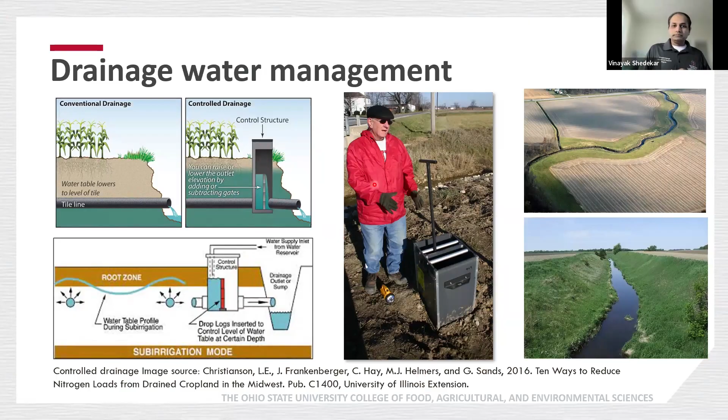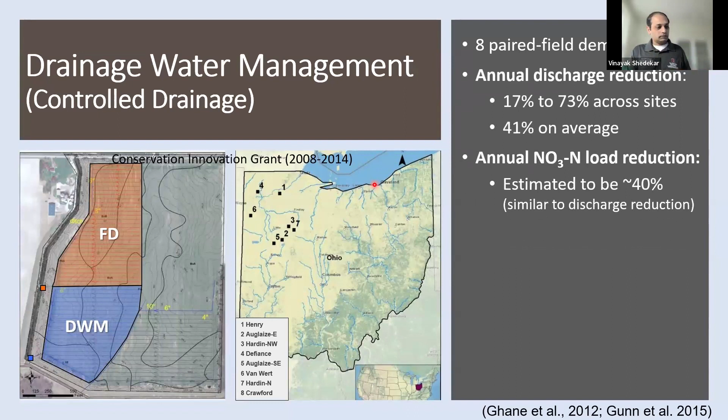Now, controlled drainage has been studied here in Ohio for the last 20 plus years. Dr. Norm Fausey, Larry Brown, and Dr. Barry Allred have done outstanding research on this practice. And we know that this practice works in flat landscapes for reducing discharge. It has really outstanding water quality benefits, up to 40% nitrate reduction.

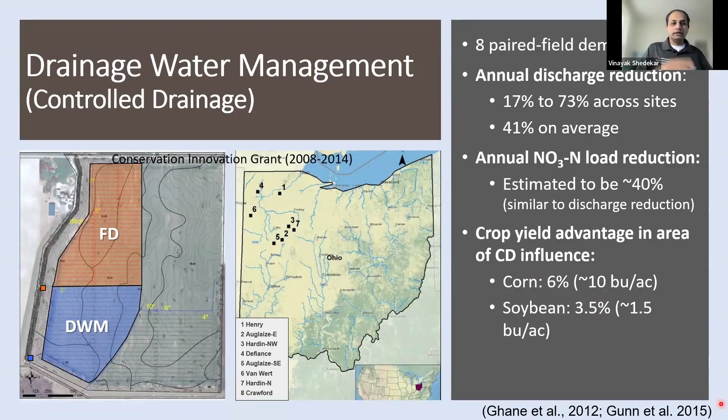And it does have some benefit to crop yield, especially in dry years. We have seen about 6% yield benefit to corn, about 3.5% to soybeans within that zone of influence. ODA has conducted similar surveys and found out that over 50% of the producers actually experience an increase in corn and soybean when they're using controlled drainage during the growing season.

Now, we know that controlled drainage is a win-win practice, mainly because it has the potential for crop yield increase as well as the benefit to water quality. However, it does not give you the surety that it will supplement all the water that is needed. My estimate tells me that there is about an inch of water that you can gain in a soil profile by practicing controlled drainage during the growing season.

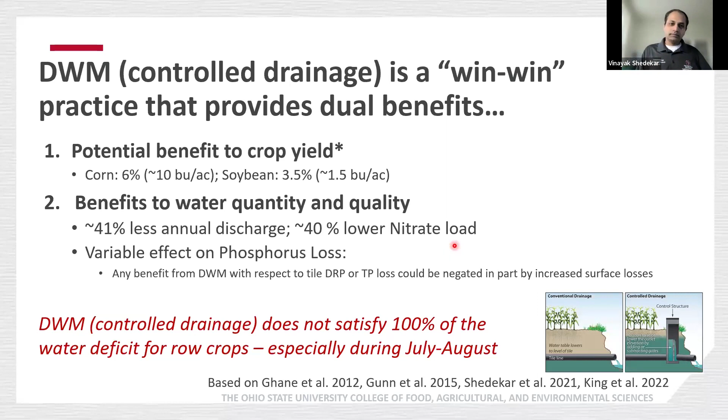It's a passive practice. You're going to retain more water in the field, but that doesn't mean you're going to retain water throughout the growing season. That water is probably going to get used by mid-July or end of July. And after that, you're still going to end up with a situation where the crops are suffering from a deficit. And that's where I think supplementing additional water through drainage water recycling comes in.

As the name itself describes, it's a simple practice where essentially instead of letting your drainage water discharge into a ditch, you're creating a storage structure of some kind, a reservoir, and using that water to then irrigate the cropland, whether it's that same field or some other field downstream. But essentially storing, capturing, and then using that water for irrigation is the concept.

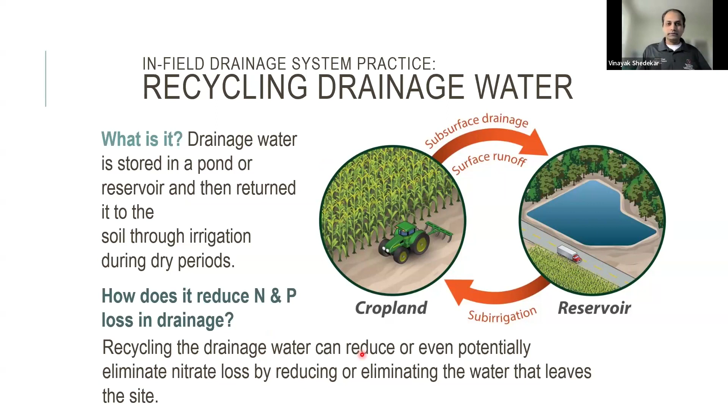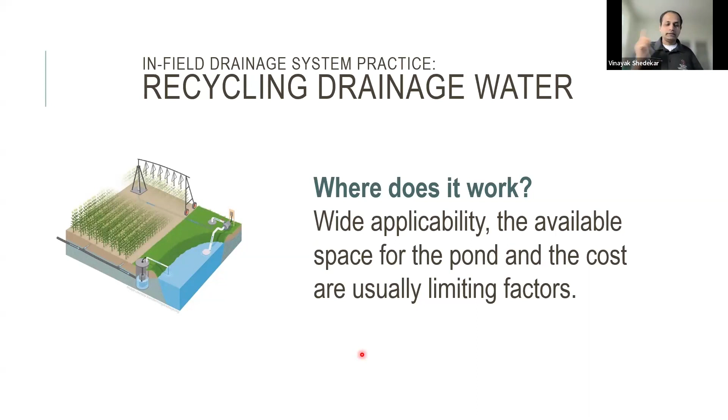And we have seen some really good benefits with respect to water quality, because you're essentially reducing the discharge from that field going into the downstream water bodies. And it also seems like we can apply it to landscapes that are not flat. With controlled drainage, as I said, the first criteria was it had to be a relatively flat field. You could potentially look at rolling topography where you could still be capturing the water and then pumping that back uphill for irrigation.

When it comes to capturing the water, I think I covered that with a reservoir. And then when you're irrigating, you have multiple options. It could be an overhead irrigation system, a subsurface irrigation system, or a sub-irrigation system. This also has recently been added to NRCS practice standard 447, which is now called irrigation and drainage tailwater recovery. It used to be irrigation tailwater recovery.

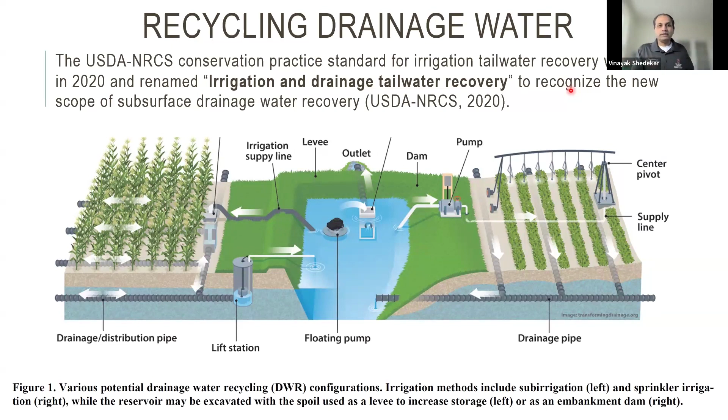So there is opportunity for some EQIP dollars to flow through for this practice. Unfortunately, right now here in Ohio, it's not on our EQIP list. So even if you wanted to, you won't be able to get NRCS funding for establishing a drainage water recycling system.

There's multiple benefits, as I mentioned. Irrigation is definitely going to help you increase the crop yields, water quality benefit. There is some potential to actually have an impact on downstream flooding, especially if you're putting a reservoir at a larger watershed scale. And then there is possible options where you could be integrating this with your manure application, using it for dilution and so on.

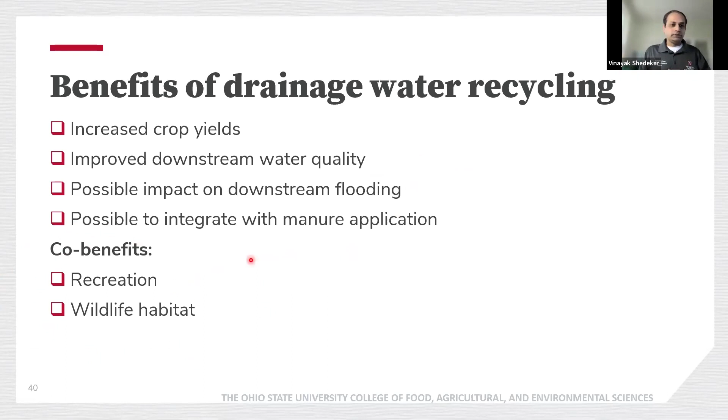There are co-benefits as well. There is co-benefits with respect to the wildlife habitat and recreation as well. Here is a regional synthesis that was done on drainage water recycling.

Drainage water recycling. We had an increase in, I apologize, I'm working from home and here's some background.

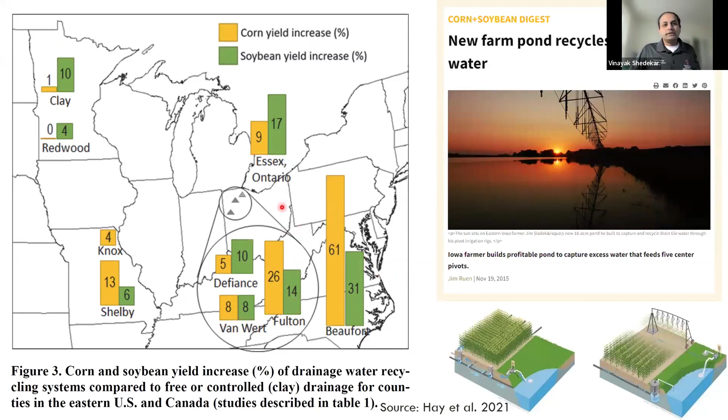So there is definitely some increase in crop yield response with drainage water recycling. One step further beyond that, we do have the option of pairing it up with more ecological practice like the wetlands. And interestingly, this research was done in the 1990s. So we have already proven here in Ohio how a drainage water recycling system can exist with.

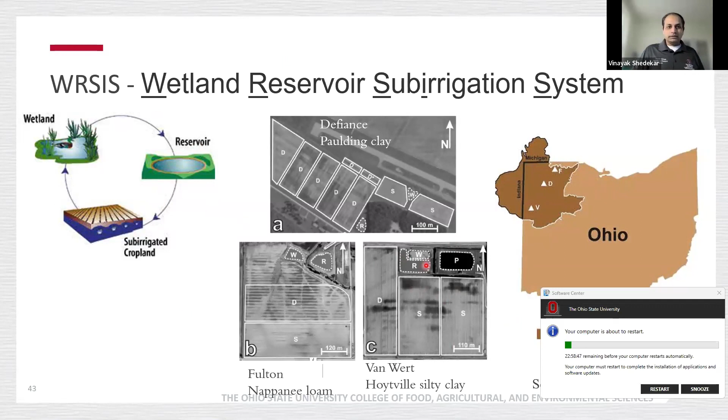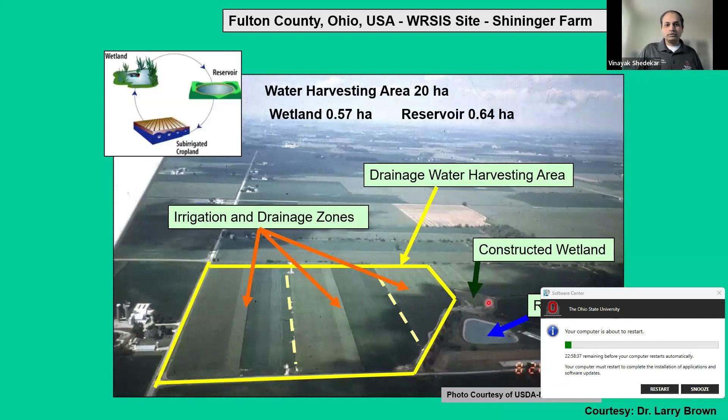And there was 10 or 15 years of research done. Here is an example from Fulton County, where they had a field that was sending water through a wetland into a reservoir, and that was being pumped back into those fields. There's a nice fact sheet on the Transforming Drainage website that shows you the benefit of this system. And instead of calling it a win-win, it's actually a win-win-win practice where you're getting the crop yield benefit, the nitrate, or the water quality benefit, as well as a habitat benefit.

So I'm going to quickly talk about the capture and storage component of this system. If you were to apply 5 inches on 40 acres, an acre inch is roughly about 25,000 gallons. It's slightly more than that. For simplicity, I'm using 25,000 gallons. So 1 inch of water over 40 acres is about 1 million gallons, and 5 inches of water over 40 acres would be about 5 million gallons. So that's how much water you would need if you were to apply 5 inches over one season, right? So that's the kind of capacity that you would want to build in your irrigation pond if you were to irrigate 40 acres.

So here is a site that we're developing right now at OSU Lima campus, and we're collecting surface water and drainage water from about 40 acres of these two fields that's coming into the pond, and then we're going to demonstrate overhead irrigation on one side and sub-irrigation on the other side. So that's kind of the intention for this site.

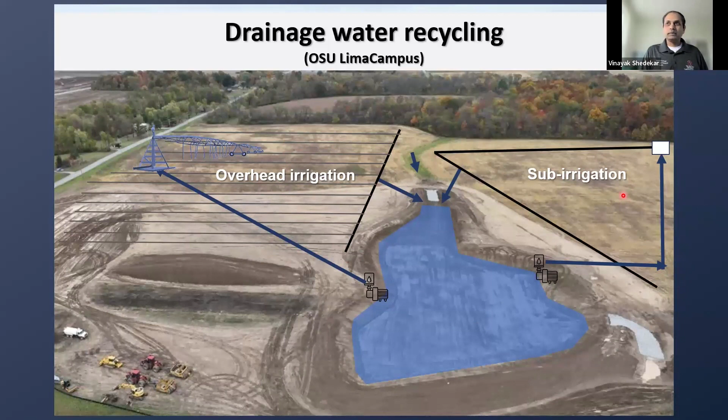Then, let's see. Another aerial view of the site. This is also during the construction of the site, while the pond was being built. As you can see, it's a pretty significant footprint. This is about a 2.6 acre water area, maybe close to 3 acres of area that went out of production.

In this case, the design process and the construction process is very involved and requires you to have an engineer, a professional engineer, and a pretty big team to manage that project. One hiccup we had was we suspected that there were some sand veins at the bottom of the pond after it was dug. Luckily, it ended up being a controllable situation, but those kinds of situations can create a bit of a limitation, or at least a need to take additional measures.

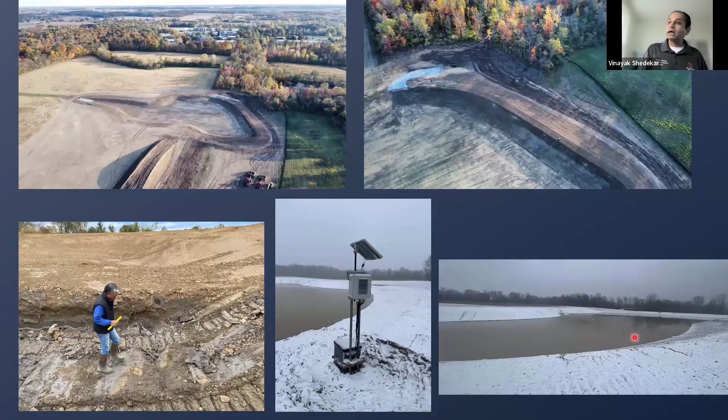One unique thing we have done is we have fitted our pond with an automated control system, or a smart drainage system, which would allow us to remotely operate the outlet of that pond so that we can control the water level in the pond, even from our office here. And this is how it looked probably 2 weeks ago, about half full as of now.

When it comes to drainage water recycling, these are some of the questions as a farmer you should be asking. Number one is, can I afford it? The project itself costs a huge amount of money upfront.

Yeah, but when you look at the cost economics, you do have a return on investment that you can calculate based on that benefit that you see. How much land will be taken out of production? What is the opportunity cost there? What are the trade-offs for the cost and the payback periods? And then who will pay for it? Can I get any cost share or assistance on this?

And the answer is it depends as of now, mainly because the practice standard 447 is not yet approved. I shouldn't say approved, but adopted here in Ohio. When you're investing into a completely new system, especially irrigation, not every farmer is used to it. There is a bit of a learning curve, and the maintenance and the troubleshooting needs, all of that probably comes up as part of this.

In terms of planning process, just to give you some idea on how large a pond we're talking about, as I said, for 40 acres, the calculation for us was about 2.5 acres, 8 feet of depth and 2.5 acres of pond area to irrigate 40 acres. So if you look at that ratio between the pond area to irrigated area, essentially you're looking at about 1 acre of pond area per 15 acres of irrigated area, or somewhere between 1 to 15 and 1 to 13 or 1 to 10. So it's a significant amount of storage area that you need.

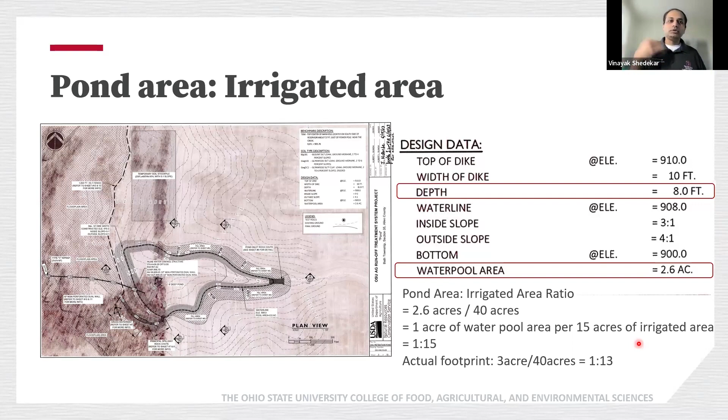So what you probably need to be thinking about is, how can I shrink this? Do I really need to store all 5 inches ahead of time? Or do I build a pond only for 3 inches, but have the ability to supplement that? Because if you're reducing the amount of storage needed, that means you're reducing the footprint of that pond. And here is an example.

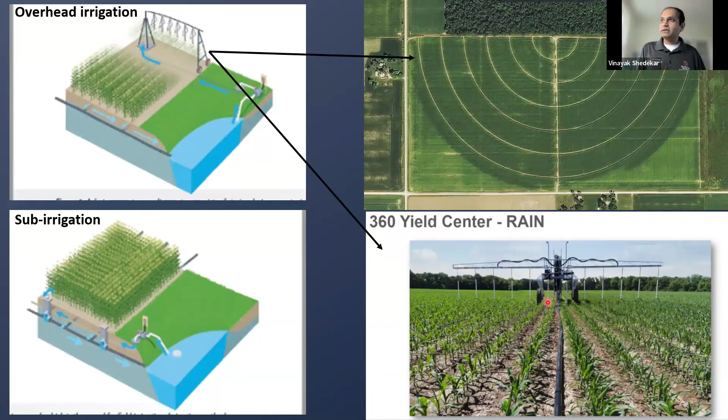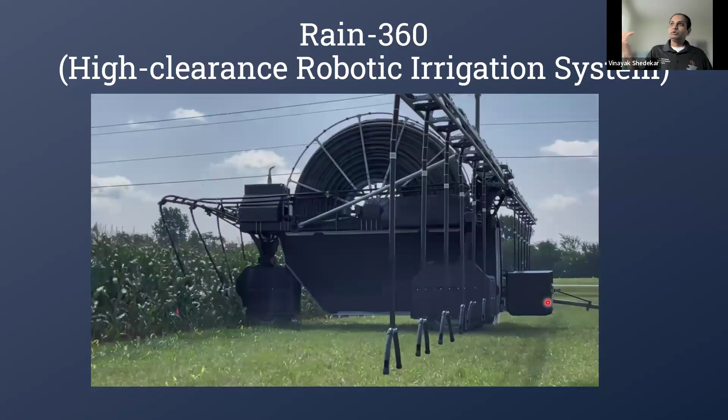When it comes to irrigation, as I mentioned, you have the option of overhead irrigation and sub-irrigation. Center pivot systems are very well known. This is a newer system, 360 Rain, that has recently come on the market and seems to have a lot more potential because of the portable nature. So it's not bound to one field. You could transport it from one field to another, and it spools the supply line on its own, and so on. So it's a pretty cool system, has a lot of potential.

Overhead irrigation has been tested here in Ohio. A lot of anecdotal evidence. Farmers in Southern Ohio are already using it, and they're seeing about 65 to 100 bushel yield benefit. And for corn, the return on investment is really good on this system, especially in Southern Ohio. So irrigation itself as a practice has been very well proven. And for irrigation systems, there are some NRCS funding mechanisms available. The criteria is, however, you have to be irrigating already to then sign up for some of the other management type of funding mechanisms.

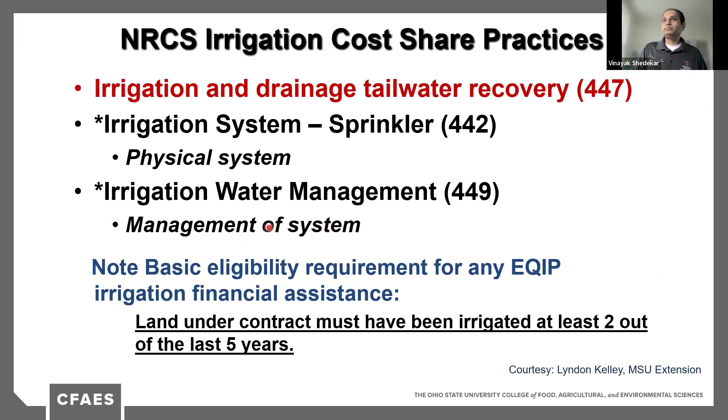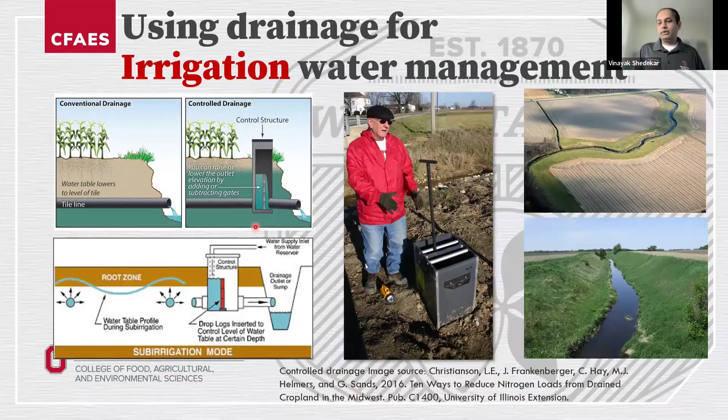The other option is sub-irrigation, where essentially you're using the drainage system for irrigation. And what you're doing is you're pumping the water out of the pond into your drainage system. And then that's going back. So you're collecting the water from the drainage system into the pond. And then here is the loop going back.

You're pumping that out. You're not necessarily putting it through the same outlet pipe, but it would be ideal to pump it into the most upstream portion of the field first and irrigate those portions, and then come downhill as you are irrigating those different sections. And you can make this happen with the help of these control structures that I had mentioned for controlled drainage.

Essentially what that does is it is pushing that water back into the system along the laterals. So if these are the two laterals that you see, the water that has been pumped back into the system is going to be pushed out of those laterals, and it's going to push the water table up.

The key is to bring the water table in the root zone uniformly above those tile lines, and especially within the root zone. So you need to be pumping water continuously until you have maintained the water table in between the two lateral lines, not just above the laterals.

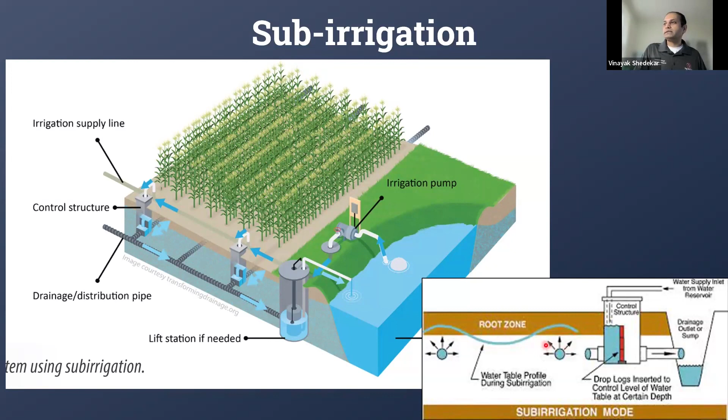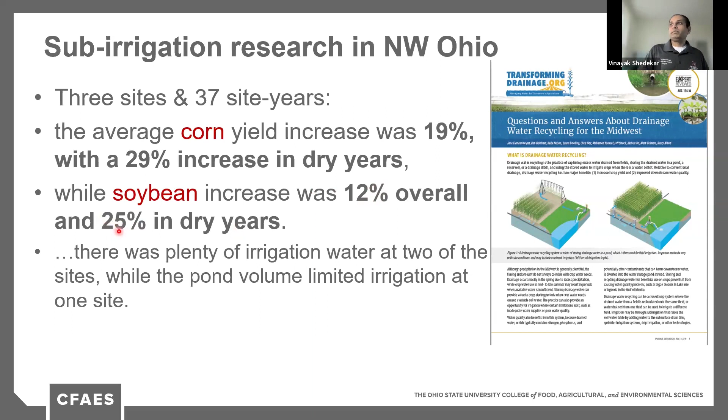Again, sub-irrigation research has been done over the last 25 years here in Ohio, and it has been proven that for corn, we're looking at about an average yield increase of up to 20%, and in dry years, it goes up to 30%. For soybeans, we're looking at 10% yield increase, 12% yield increase, and in dry years, it looks more like 25%. So these, again, there are really good references here in terms of these fact sheets.

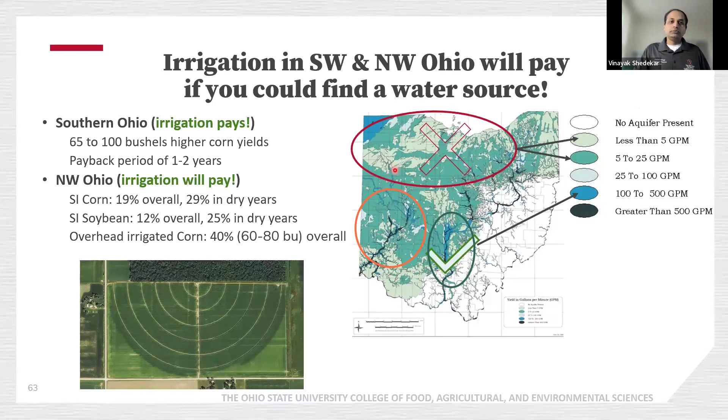Anything this color, or this color, is essentially a well discharge that is not going to be able to support an irrigation system. So in July and August, when you're actually needing the water for your crops, there is absolutely no source that you can tap into for irrigation. And that is the primary reason why we need to think about storing the drainage water that you are otherwise letting go during the non-growing season.

So if you look at after harvest, the drain flow picks up. This is drainage outflow on a monthly basis. By the time you're ready for planting, you have already let go about 8 to 12 inches of water out of your tile systems. That water, we don't need all of it. We need about half of it that you can store.

During growing season, you're looking at anywhere between 2 to 4 inches, but there is a very high variability and uncertainty in the growing season. So the best way would be to bank on that water that you're otherwise letting go during the non-growing season, store that, and then use that during the growing season. Let's see. This is probably my last or second to last slide.

Where do I start? I would start looking at the maps for my entire farm, and especially if you have drainage maps for individual fields. See if there are locations, and Mark would probably relate to this and probably argue with me that, hey, you're talking about finding good spots for wetlands, and I totally agree with you. I think there is space for wetlands and these irrigation ponds to coexist.

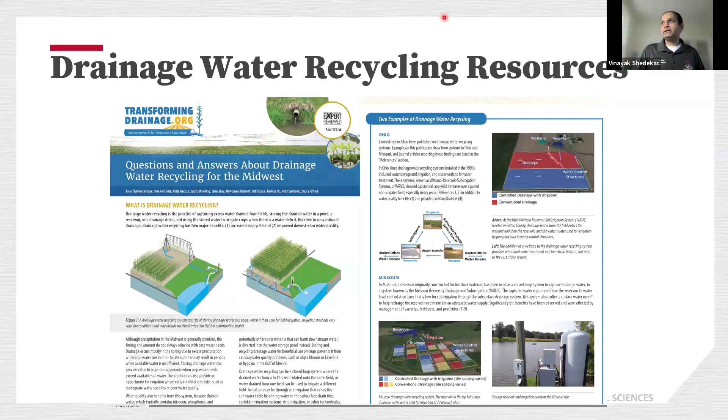If you go to this transformingdrainage.org website, you'll find this fact sheet and you'll find it very useful. It's a questions and answers type of format, and they have some case studies, and there is a case study from Ohio there. So very useful information on that website overall. If it comes up, I'll be happy to share my screen again and show you the website and some of the tools and videos that they have.